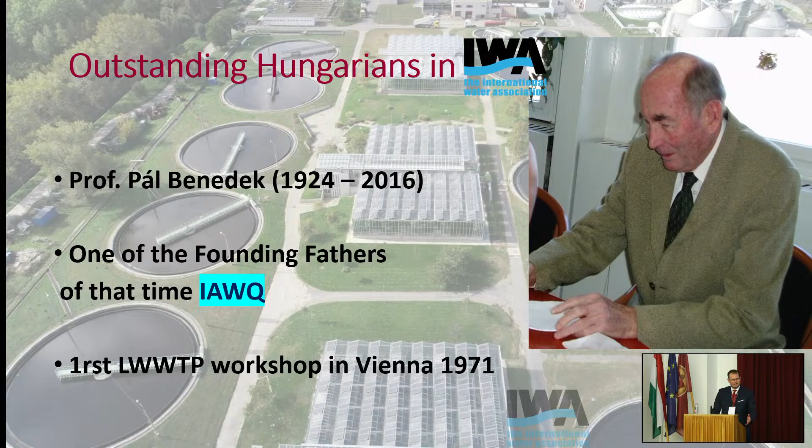Hungarian contribution to IWA. I would mention here two outstanding personalities. Firstly, Professor Pál Benedek, who was one of the founding fathers of the IAWQ, which was the ancient IWA organization. Furthermore, he was a co-organizer of the first large wastewater treatment workshop in Vienna in 1971, alongside professors like von der Emde from Vienna, Eckenfelder, and so on.

A further personality I would mention is my predecessor as head of department, Professor László Somlyódy, who among others even served as president of the IWA from 2004 until 2006.

How we came to this visit? Thank you, Kala, for accepting our invitation. We organized an extraordinarily successful IWA conference last year, 2024, in Budapest, which was really a big success in a very good atmosphere, as you can see in the pictures. This conference included more than 300 attendees, 35 plenary presentations, 8 keynote presentations, 8 workshops, a lot of site visits, and a variety of cultural programs.

The largest event of the IWA is without doubt the World Water Congress, which I would like to mention here. The World Water Congress is organized every 2 years and includes more than 10,000 attendees, so it's a very big event. The past venues were very prestigious cities in the world, like Copenhagen, Toronto, Glasgow, Kuching, which will be in 2028, and Sao Paulo in Brazil. And we have an idea - why not Budapest in 2032?

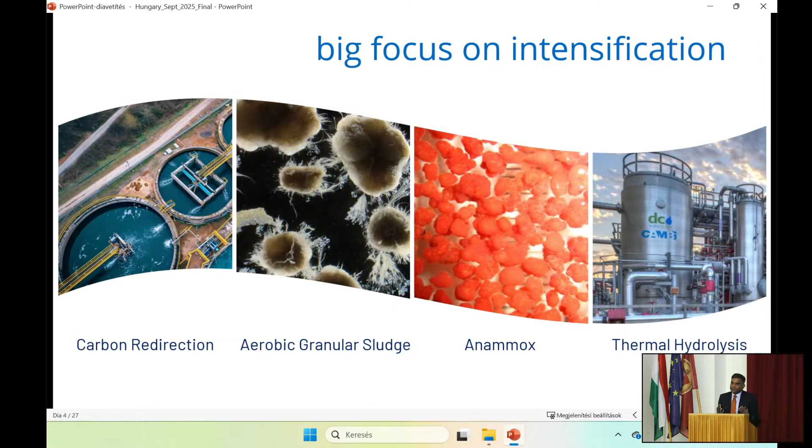But here's the paradox, and it's important for you to understand it: reducing energy does not always mean that you reduce your emissions. Some of the innovations around intensification have unintended consequences, particularly in terms of emissions.

One example I showed on the other slide, which I intentionally didn't talk about, was Anammox, a process for nitrification and denitrification in our wastewater treatment processes that saves a lot of energy. At first you'd think this is very good because it saves energy, but this process can sometimes unintentionally generate nitrous oxides, and nitrous oxides are 300 times more potent than carbon dioxide. So what looks like an energy-efficient process might be very inefficient in terms of its climate impact.

So when we talk about low carbon or net zero, the focus has to be on greenhouse gases and not on kilowatt hours saved. And the interesting thing is, it's a bit counterintuitive, but in some cases actually using more electricity, particularly if it comes from renewables, may actually lower our carbon footprint. If our electricity is renewable, and we're seeing a lot of that in the water sector, our Scope 2 emissions are coming close to zero. That's making the case for more energy-intensive treatment processes, because it reduces the potential for unintended consequences like methane and nitrous oxide.

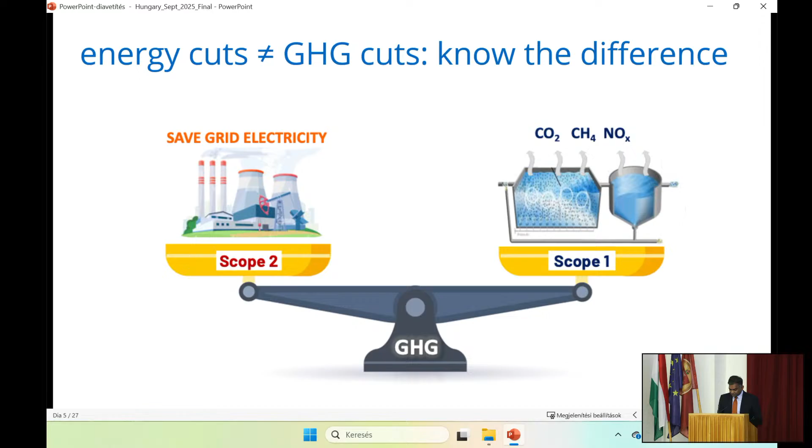So while we cut emissions, we also need to ask ourselves how can we build systems that are flexible and robust so that we can manage what happens next. This is where adaptation comes in - it's the other side of the coin in the climate discussion. When we talk about adaptation in the water sector, I see two important pathways that stand out: the productive use of water, and the circular economy.

Productive use means thinking about what we want the water to do for us, and how we can match the quantity and quality of the water to that intended use. This moves us away from thinking we need high quality drinking water for everything. Of course, drinking water must be pristine, but for flushing toilets, irrigation, and cooling, we can use lower grades of water. This allows us to use water multiple times in a cascading way, maximizing productivity by doing more with less.

On the other hand, circular approaches focus on reducing waste and reusing as much of our resources as possible. For businesses and industry, this means managing water in a way that boosts their resource availability and ensures long-term operational stability. It's really about improving the supply chain resilience of their operations.

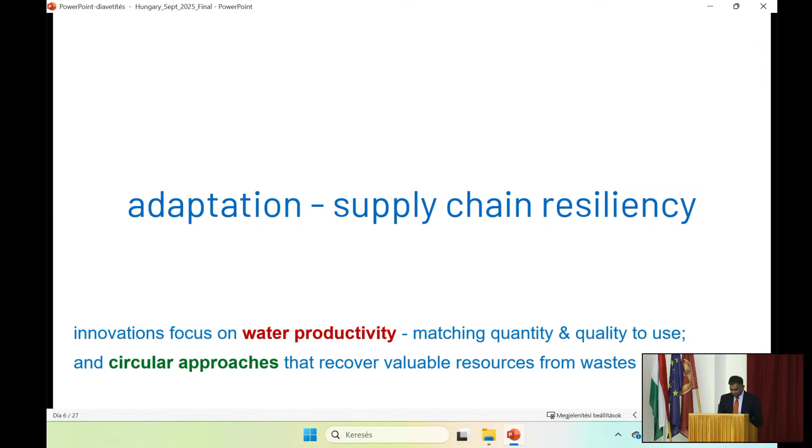A great example of the productive use of water is the West Basin Initiative in Los Angeles, California, developed in the 1990s to deal with water scarcity. They take wastewater from the city of LA and create what they call designer waters, or waters of different flavors, using different plug-and-play technologies to create these different grades of water. They can change these treatment trains as needed and create different quantities of these grades - one for irrigation, a different one for cooling, another for use by industry, and another for AAR, artificial aquifer recharge, where we recharge the groundwater.

This is really a great example of advanced reuse, and it shows the power of productive use thinking. Because we're using the same amount of water, but by cascading that use, our overall water footprint goes down. These approaches challenge the old assumption that most utilities have - that if we've got growing demand for water, we need to take more water from the river or aquifer. These approaches, and also integrated urban water management, push you to look at efficiencies embedded within your system.

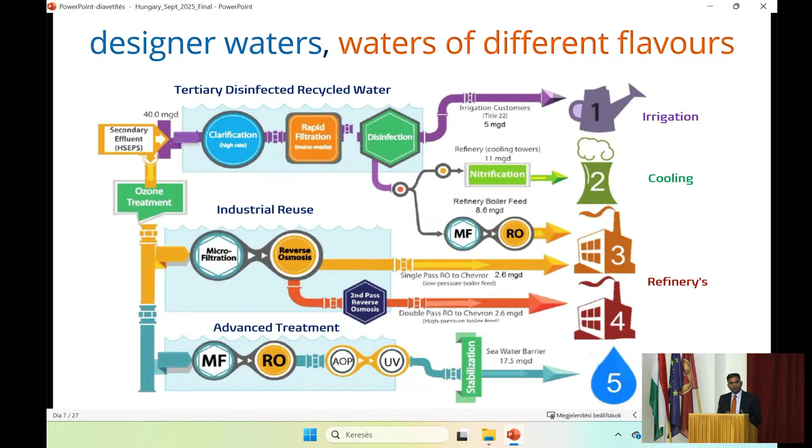So reducing leaks, implementing demand management, capturing rainwater - all of this avoids having to build new infrastructure to move water long distances, because you're investing in efficiencies from within your system. The outcome of some of this thinking is you start to develop what we call a portfolio of sources - many sources of water that you can depend on.

A great example of this is in two cities, and we were just having a chat earlier about Singapore. Singapore is very famous - it created what's called the 4 National Taps, and I don't think you can see it very clearly.

Singapore depended a lot on Malaysia to supply its water, and Malaysia used to threaten Singapore that they will close the tap if Singapore behaves badly. So Singapore was always at risk. What they did was they started to create new sources of water to diversify that risk. They built a reservoir, the Marina Barrage, which captured stormwater. They then invested a lot in desalination. And then they took wastewater and treated it and created what they call new water. So if one of these taps dries, they've got 3 other taps to depend on.

This is quite a famous example, but the more interesting example is in South India, in Chennai, where they've got this approach called the Aru Kudams, or 6 pots. It's very similar in concept to Singapore. They had an extreme drought in 2019, so they invested a lot in diversifying their sources. They have their surface and groundwater, quite a lot of desalination taking place, and they use a lot of treated wastewater to support their industries. They invested a lot in rainwater harvesting at cluster level, this is at sort of apartment block level, and of course water conservation.

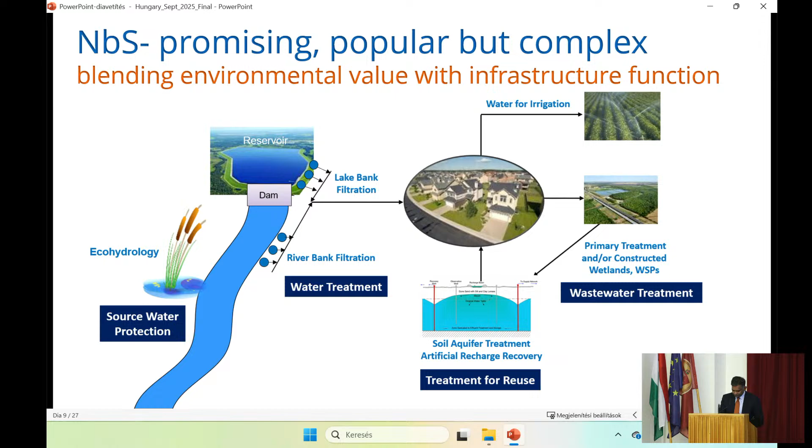Now, one of the most exciting global conversations you see in water right now is around resource recovery, turning what used to be wastes into products with real value. I travel a lot around the world, and in the developing world, in the global south, these approaches are very interesting because they're building a lot of new infrastructure. They're building this stuff at the design stage itself, not like in the global north where we sort of retrofit. They're actually hardwiring these approaches from scratch, hoping they'll provide revenue to help sustain their operations, which have been very difficult to do.

So we see a lot of technology in this space, where you can recover things like biogas, biofuels, nutrients such as phosphorus for fertilizers, and other products like biopolymers for plastics, sulfur compounds for battery production, etc.

But here's the thing: the technology is advancing, we're doing a lot of work in that space, but our understanding of the markets, the business models that support these systems, is lagging behind. We still know very little about the profitability of these products. Who will buy them? What will be the supply chains that will keep them going? Most of our focus in this space has been around developing the technology, not around understanding the customers for these products, the value chains, and the cost structures.

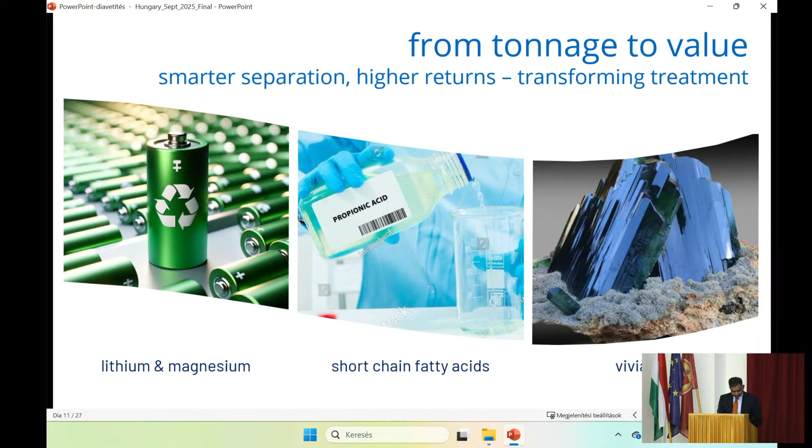However, as I said earlier, success depends not on technology alone. Each recovered resource, if you're a utility trying to recover some resource, comes with its own technical demands, its own costs, its own market realities, and its own supply chain needs. So a utility shouldn't and mustn't try to chase every possible product they could potentially recover. They have to choose a lane—say, I think this is the one I could probably recover, and focus on that. They have to be strategic in choosing that resource recovery pathway, and the markets have to align with their local context and the industries around them.

And that's the important thing: they need to understand their local industrial ecosystem for the recovered products, and they need to build relationships with the off-takers, the processors, and the end users.

The winners in this space won't be the utilities that try to do everything. The winners will be the ones who focus on targeted recovery pathways, build the right industrial partnerships, and create viable business models around recovered resources that make sense for their region. In our meeting in the Netherlands, it was quite challenging for some utilities to think this way—choosing a lane, focusing on one product, and understanding their industrial ecosystem to support it.

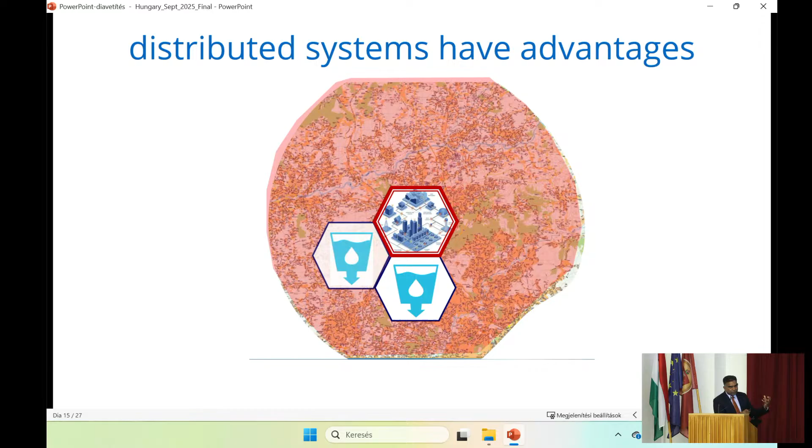We could build decentralized modules that actually map the way urban growth takes place. Rather than trying to anticipate how growth might happen, we start to map it so we can follow the pattern of growth, allowing us to phase in or stage our investments over time.

What we can also do is be technologically agnostic—there are lots of innovations in decentralization. We might put a certain type of technology in a low-income community and a different technology in a high-income community, but the outcome will be the same: everyone gets safe, equitable water supply and sanitation services. This is what the solar industry does—they create different types of solar technologies for different communities at different price points. So what if these decentralized approaches move away from one-size-fits-all, allowing us to be technologically agnostic?

The other thing is that these systems also better promote the circular economy narrative. Water is very heavy, and when we talk about reuse in a centralized system, we use the water, move it long distances, treat it, and then move it long distances back. That requires a lot of energy. Whereas with decentralization, the resources are generated very closely to where they're needed and where they can be used.

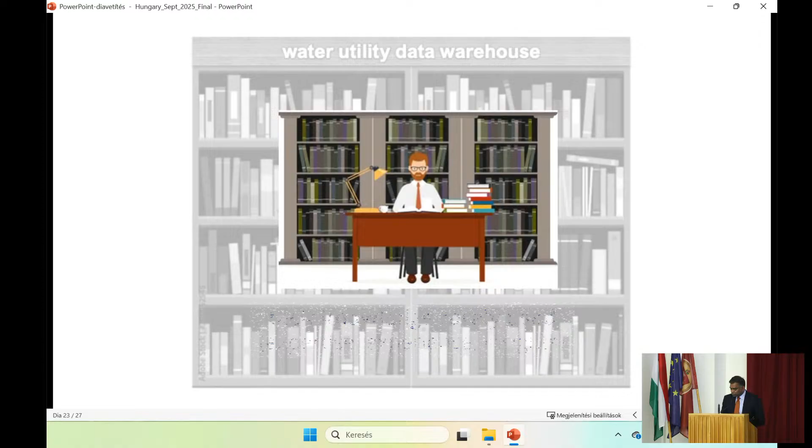But data isn't just what we record in systems. Some of the most valuable knowledge lives in the experience and intuition of our people in the sector. When you think of a library, you have the books that hold the facts. But the librarian knows what the real gems are in the library, and they know which books matter the most. In our sector, the librarian is the veteran pipe fitter who can sense a leak before any sensor can.

It's the billing clerk who can spot unusual patterns long before the system flags them up. This tacit knowledge, built over decades of field work and mentorship, rarely makes it into our databases. It lives in the stories, conversations, and the hands-on experience of the people that work in a utility. Now imagine if we could capture and analyze that wisdom.

With generative AI, you can turn the recordings, interviews and field notes into searchable, actionable insights, making sure that the expertise of today's librarians guides tomorrow's decisions. So imagine this model we're working on: you get access to your 15% of structured data, your 85% of other data, plus tacit knowledge from your workers, the people who really run and work the system.